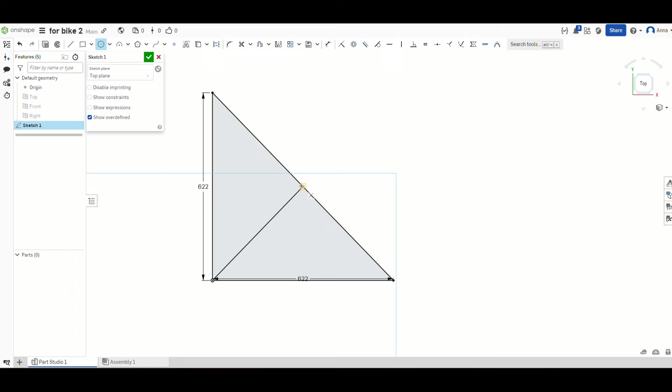I start off in Onshape modeling a wheel for the bike with a diameter of 622 millimeters. I realized later that that's kind of small for a bike wheel, so I go back and I increase the diameter of that wheel. But I just want it as a baseline so I can sketch around it to get the shape for the wheel holder.

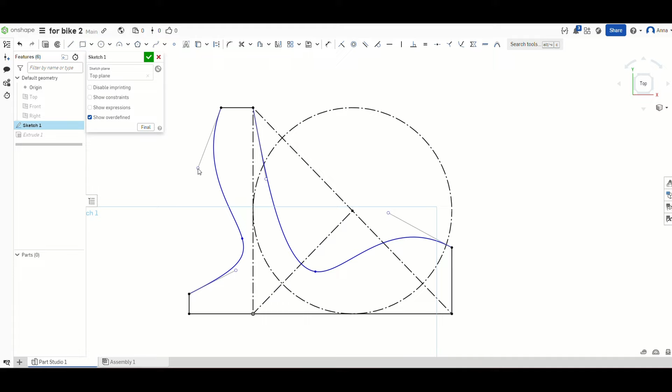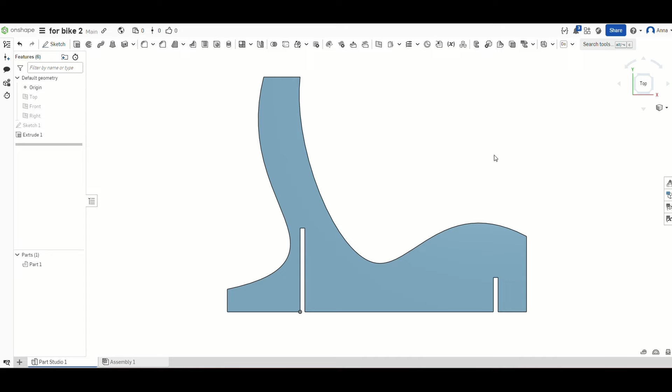I'm going to go in and add some notches to the wheel holder for cross beams. The cross beams are going to be a nice friction fit here and support the wheel holders so they stand up. The width there is set to the depth of my plywood. I'm adding some holes to the top and the front for a lock, and also a dowel to support the top of the wheel holder.

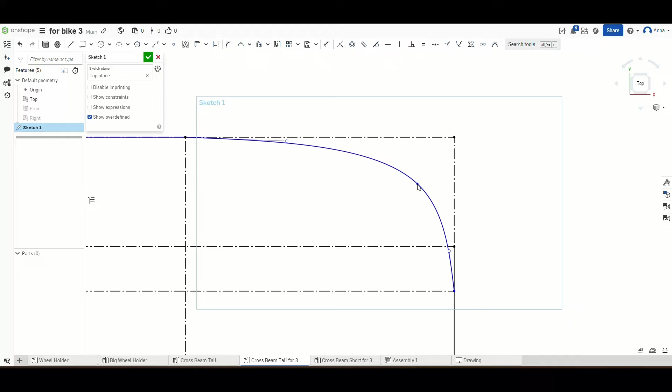I'm starting on the cross beams, just kind of eyeballing the curves I want, because Onshape's not very good at mirroring splines. And here's the smaller cross beam, which is a little less complicated.

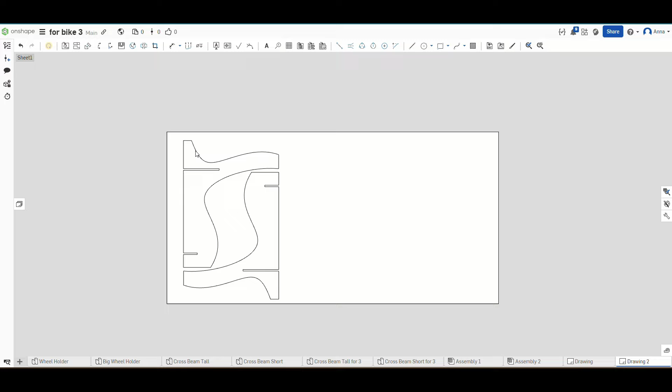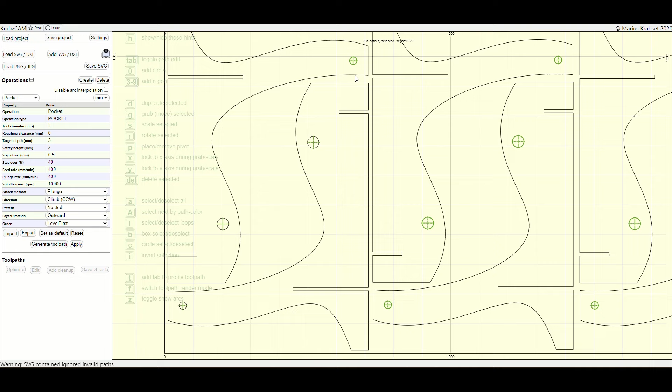I'm going to take those and import the parts to a drawing that is the same size as a sheet of plywood. That's because it's good to have kind of an estimate for how big it's going to be, and then I can also export the parts to scale. After I export that drawing as an SVG, I will import it into KrabzCAM. There, I generated a toolpath and I'm adding some tabs. Now I can export it as G-code.

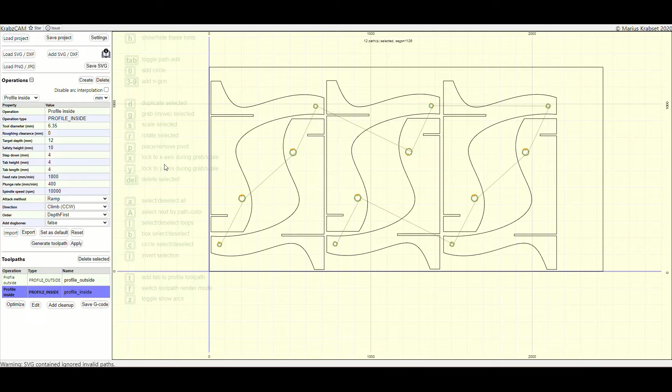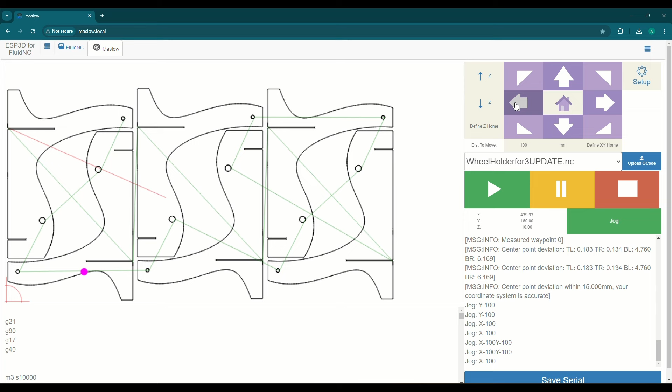Here are the cross beams. Similarly, I'm generating a toolpath and exporting as G-code. Then I can import these G-code files into the Maslow, and now I'm jogging down to the left to set the XY home. Right now, I'm jogging to the far corner of the drawing just to make sure it stays on that sheet of plywood, because if the Maslow runs off the edge, that would be bad.

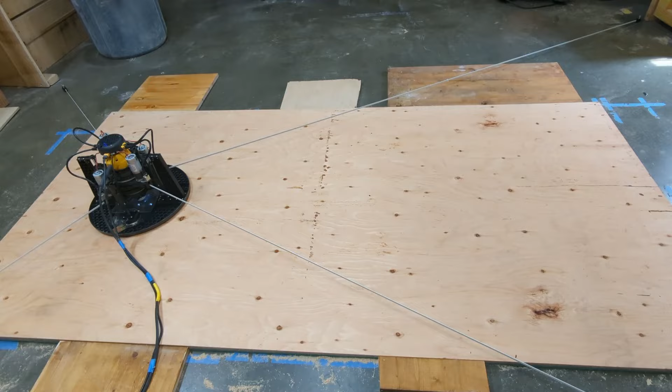After setting the XY home, I begin the cut. You can see that I've added bumper boards to the edges of the plywood to support the sled when it gets close to the edge. They're not actually fixed to anything, just to help with the sled tipping.

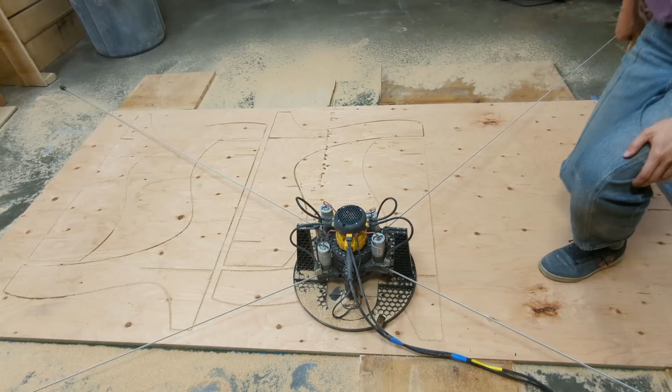One of the reasons we do these projects is to replicate errors that we're seeing in the forums. And once I start to cut this fourth piece here, you'll see an error pop up. And you'll also see how I just turn the router off and restart the machine. After a restart, I begin the cut again.

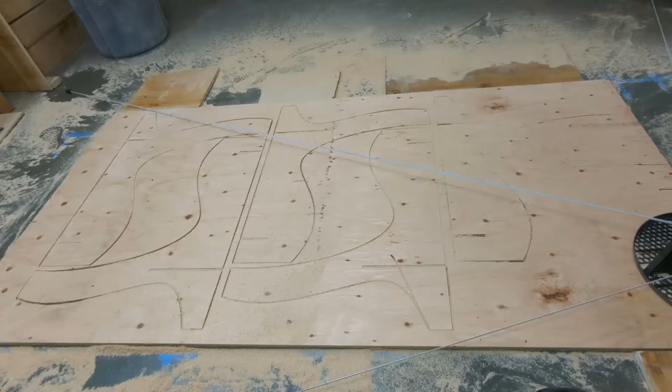Once the Maslow is done with the main wheel holders, it's going to go in and cut out the holes. Some of these parts break off and you'll be able to see the Maslow just kind of runs over the loose part and continues on its way.

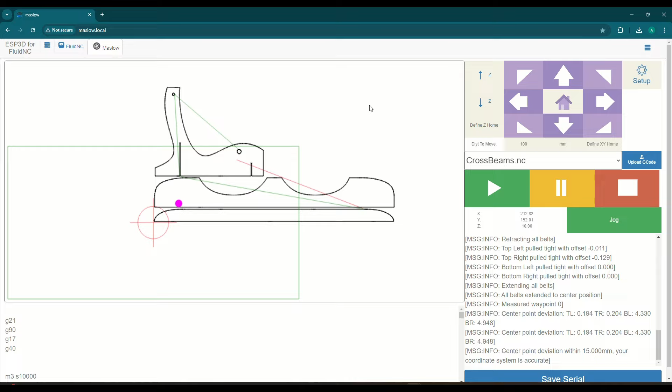Now that the cut is done, I start on the second sheet of plywood with the cross beams. I added another wheel holder to this piece because of the error we got during the first cut. These cross beams are a great test for the accuracy of the Maslow.

I got another error there at the top, and I restarted the Maslow and recorded that so Bar can check it out. After cutting out the holes, we're done with this cut. I pop the pieces out with a chisel and then take them back to sand them.

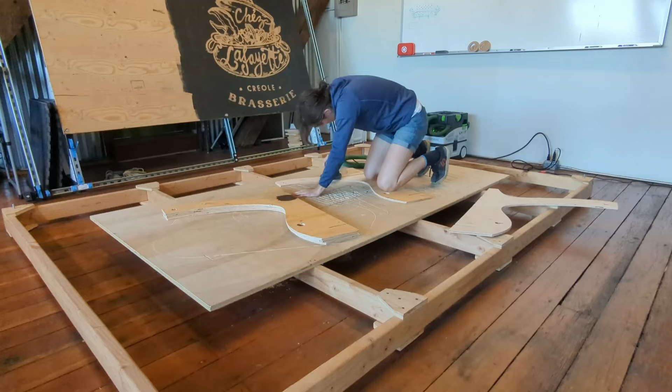The holes had tabs inside of them, so I'm sanding them with a Dremel to remove that tab. Then I chop a 1-inch dowel for the top of the wheel holders. After that, we're ready to assemble.

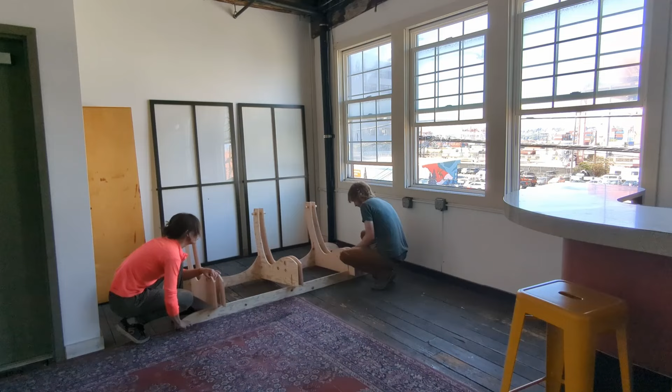As you'll see, the cross beam is a very tight fit. So after some deliberation, I decide to hit it with the sander again to make that fit a little better. After we pop the cross beam in, the bike rack is complete. Ready for testing.